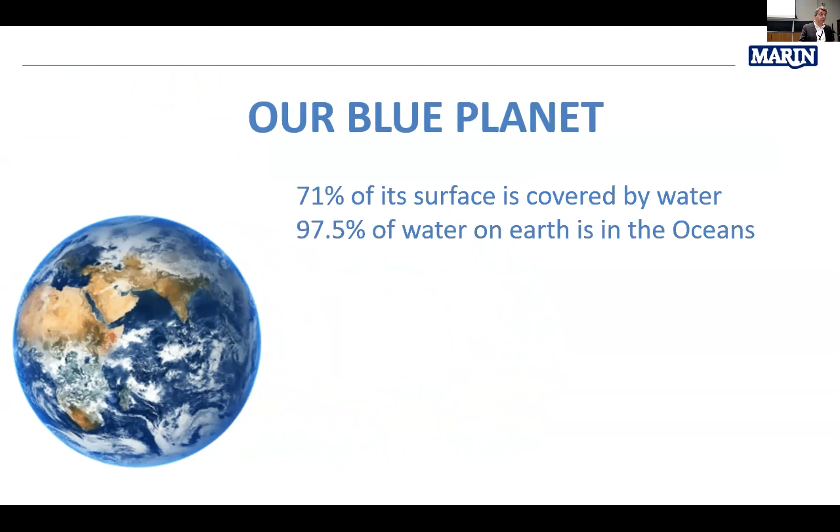Of course, I'd like to start with the most important of all, our blue planet. It's always good to remind people, I don't have to hammer that with naval architects and people busy with maritime engineering, but it's always good to remember that it's called Earth, but it's actually a blue planet. 70% of the surface is covered by water, and there's also quite a big deal of water on Earth present in the oceans.

And also, as you know, 80 to 90% of the world trade, depending on the type of trade, is transported by sea. Well, that shows how important our sector is, which is not always in the highlights, in the most prominent place in the news for the energy transition, but these numbers really show how important the maritime sector is.

We have to deal with about 119,000 ships worldwide, with gross tonnage of more than 100 gross tonnage. That's a lot to transform, because we know we'll have to come with a new generation of ships, and we'll probably have to refit a lot of them too. So it's quite a big job.

And maybe also important to know that 7,000 of those ships are transporting about half of all transport capacity, so that's a lot. That's also a niche market when you compare it to air transport or car transport, for example. So, well, that's our task: to transform this sector, and we hope we will contribute to it.

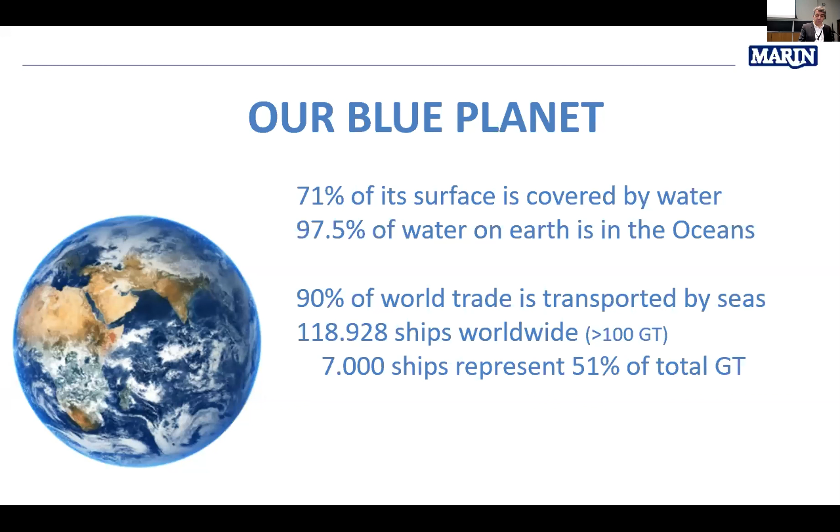Also important to remind that global emissions from shipping are about 3% of the total from all activities on Earth. So comparing the amount of activity with the emissions, we are not contributing so much, let's say, at least for GHG emissions.

The issue is that this number is expected to almost double in the coming years if we don't do anything. So we see that the whole maritime sector is really, really active at transforming its energy and also taking its share, maybe because of the close link with the ocean and Earth, showing examples despite the fact we are not always the prime interest for many regulations.

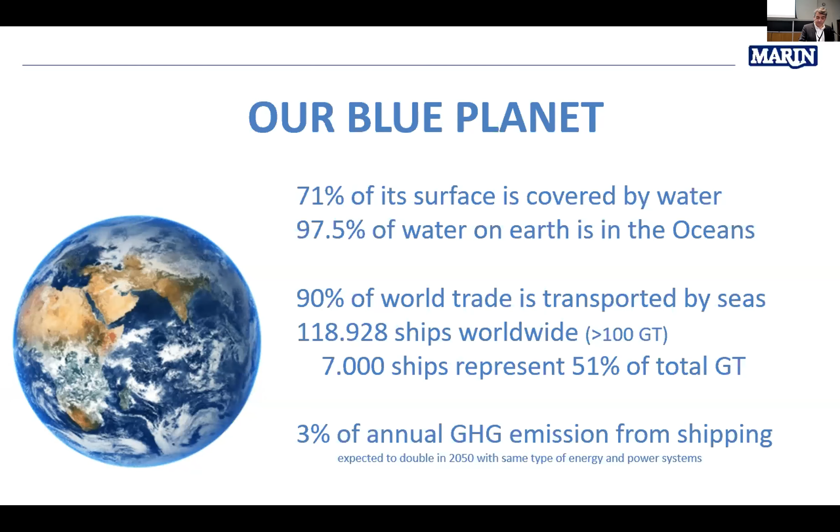Just looking back - in my discussions, I think when we started 10 years ago at MARIN talking about sustainability, things were quite clear. And I have more and more, also from industry, discussions about why are we doing that? Only 3%, what's the big deal? And Earth has been warmer earlier, so okay, why are we caring about it? So I just wanted to put that a little bit in perspective.

There have been some recent studies showing a clear relation between carbon dioxide and temperature on Earth. Of course, there have been times when Earth was much warmer than now, but life was maybe not so easy. What is at stake at this moment, as this change takes place, is that it's just too quick, too fast. We will probably be able to adapt as people - we'll use smart engineering to adapt and to go against rising seas, for example - but the rest of nature might have a really hard time.

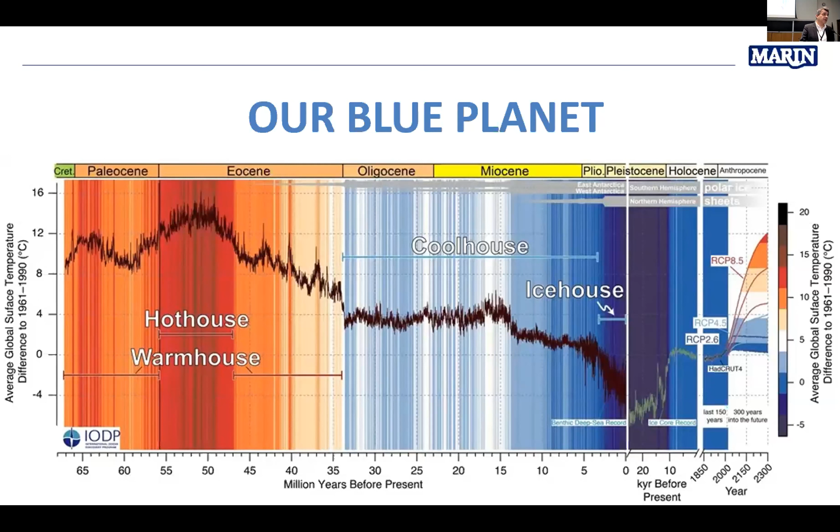All the changes that occurred on Earth over the last - this is from a recent study covering the last 60 million years - happened on the order of 100,000 years to 1 million years for the quicker changes. Now we have changes happening at an incredible rate, which is extremely worrying.

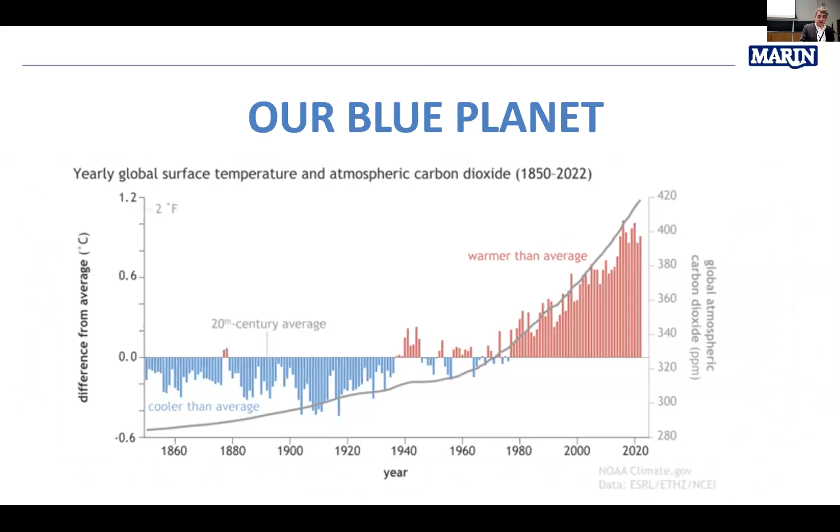Well, you know that part, the relation between our emissions and average temperature. This is what we're talking about - a very large rate of CO2 and other gases pouring into the atmosphere. That was also the origin of our wealth, our development, so we cannot complain about it. We have built incredible ships, transporting an amazing amount of goods with fossil energy.

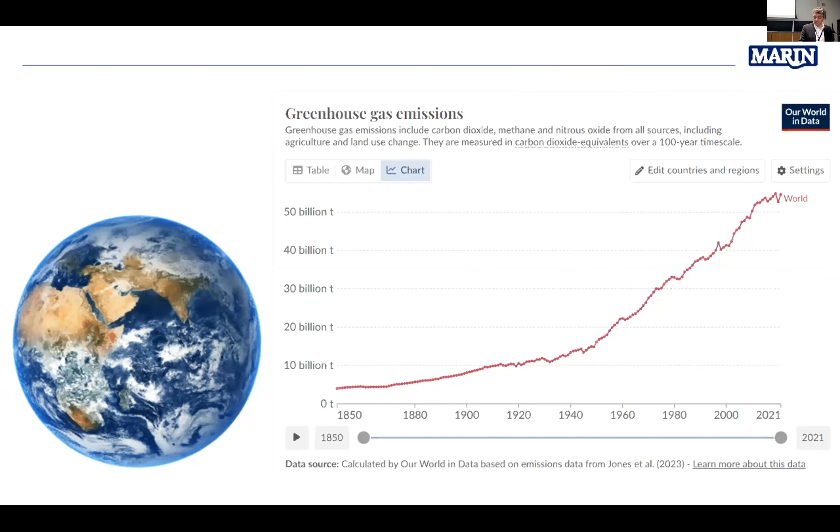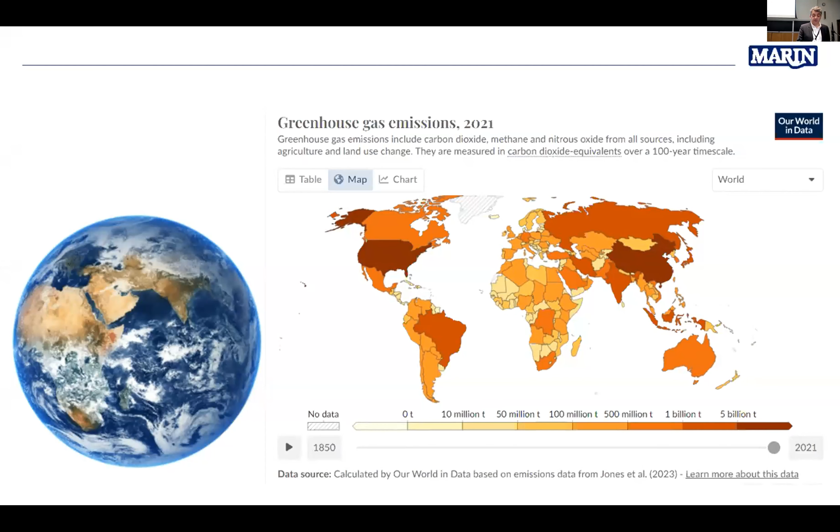But what is happening is that maritime is present everywhere, and we are taking care of transporting about everything that is transported on Earth. So if we, as a sector, can transform ourselves, that will surely have a consequence on the rest of the other sectors.

We are a kind of hard-to-abate sector, because we need a lot of power for ships, but we have a big advantage compared to air transport - we can manage a bit more displacement and volume with our ships. Still, we have quite big constraints in terms of autonomy and range, especially with new energy carriers.

On the good part, it's worth remembering - because we read in the press, and maybe you hear in your sector too - that ships are supposedly polluting incredibly more than any other means. It's always good to remember that when you look at transport capacity, ton per kilometer or ton-miles, maritime shipping is by far the best way to transport things on Earth - better than rail, better than inland waterway transport, better than trucks, better than planes. I think it's important to remind people of that, especially at political level, because they're making the rules, and we need to be helpful in that respect.

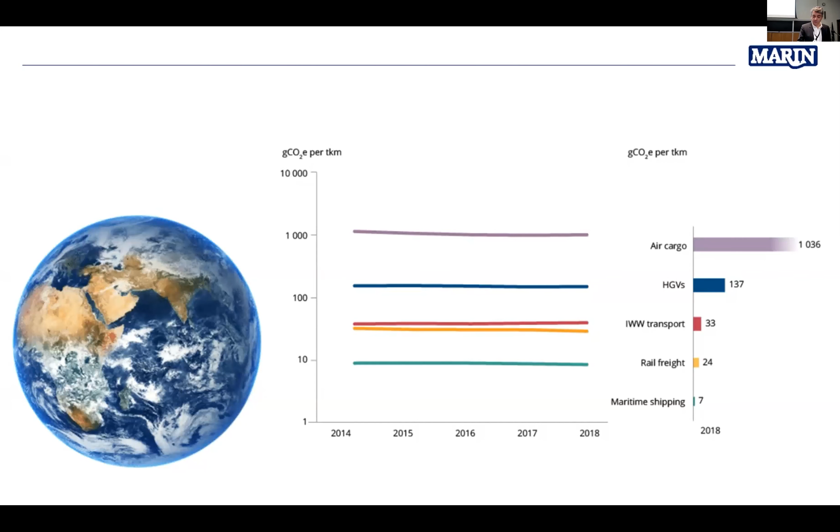I'd like to come back a little to the definition of emissions, because ships can emit many things. We have emissions that have a climate impact - that's the whole series of greenhouse gases. The most well-known is CO2, but also methane, fluorinated gas, and N2O.

Other types of emissions are more related to air quality - think about sulfur, SOx, NOx, fine particles. Very often in public opinion or in the news, those two categories are mixed up, so there are different types of conclusions taken about how bad ships are.

Another type of emission which is taking on large importance at this moment is underwater radiated noise. The focus on this is also increasing, with more stringent rules and local regulations to reduce the level of underwater noise. We have solutions for the shipping industry.

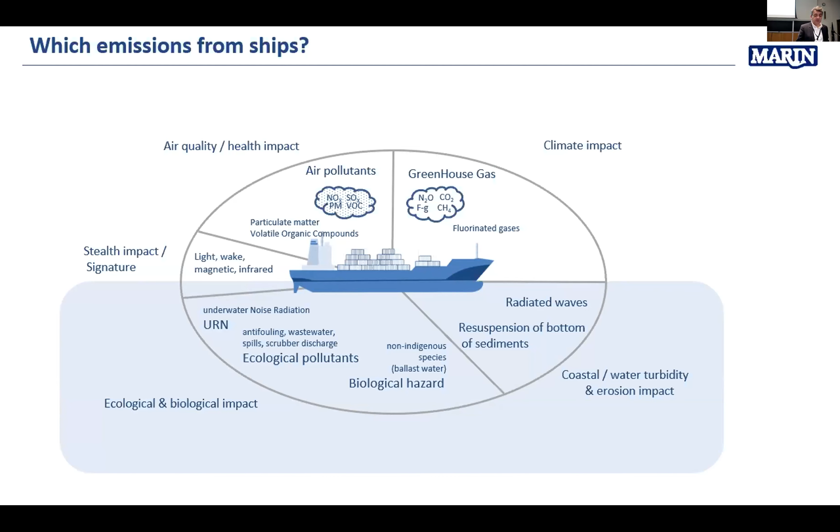I like to deal with some of these headlines that we see a lot, that we hear from friends, family, also in the news. It's almost like shipping bashing sometimes, with headlines like 'health risk for shipping pollution,' statements like 'massive container vessels equal 50 million cars' in terms of emission. I don't know if this plays a lot in the headlines in the US, but in Europe this type of news has had quite a lot of impact.

Big headlines from different newspapers, but you also see it starts to influence the political level. We've heard this type of statement from people in parliament who are making the rules. So it's very important to be very clear with the facts, to do fact checking, and try to avoid this type of big claims.

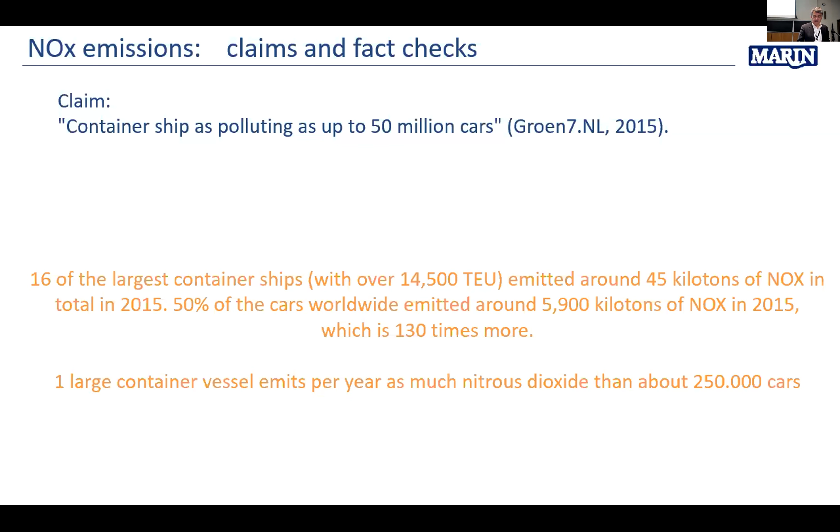So coming to the core of the presentation about designing sustainable ships, we need to have a very holistic approach. We used to work on specification, on trial condition, and we are becoming very good at having a target-based design for independent criteria.

And I'm very happy that we are also joining design and operation, because one without the other is just impossible to solve the issue. So we have to work on ship design, of course, but we also have to work on ship operations. But it's not only the ships, it's also the fuel infrastructure and the transport infrastructure.

And at last, also fleet and logistics. So it's very difficult because all the roles have been optimized through the years between naval architects, ship owners, harbor operations, trading, or the energy sector. But we need to bring all these parties together to make a move.

I would just use a simple parallel from the implementation of electric cars. Without good charging infrastructure for energy and a decent price, you cannot introduce electric cars in a country. Some companies have understood that very well, and they're successful. And we miss this type of approach at this moment from the shipping sector, which is very much separated between every specialty.

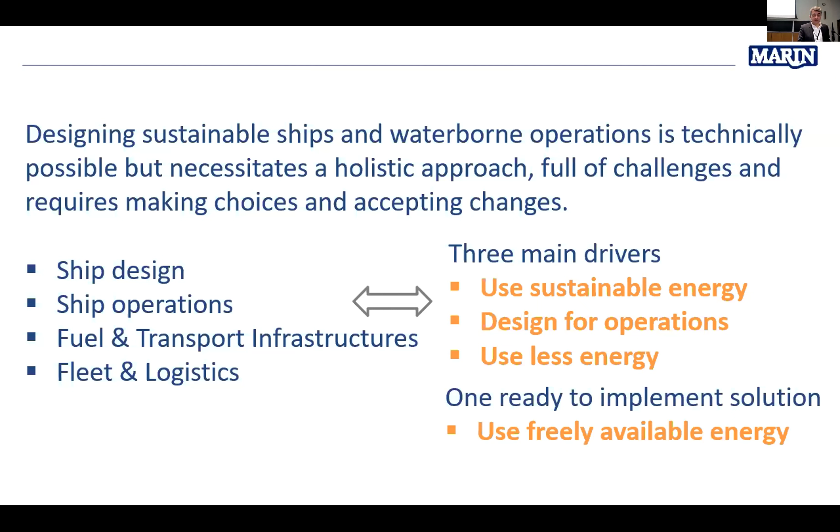And well, the last one, use freely available energy like wind. This is obvious, but I can tell you that 10 years ago, that was a very hard discussion. A lot of people find it very nice and pleasant, but not very serious. With the current developments, we are showing the world that we can do very serious things with wind.

Starting about sustainable energy, I will try to speed up a little bit, sorry, but I still have quite some slides. Just to remind the basics of the approach taken at this moment at Fuel EU regulation in Europe, but also brought to the IMO working group on sustainable alternative fuels, the life cycle assessment of our future energy use.

So not only looking at the emissions we produce while using the fuel on board ships, but how the fuel is also produced, to have a complete assessment of the emissions from well to wake. So from the resources up to what we deliver on the propeller.

There has been a lot of debate about that. I was part of a few discussions at European Commission to try to push that forward, because everybody thought like, no, holistic—I mean, the energy sector is doing his job and we are just using the fuel. We cannot be accountable for the fuel we are choosing.

Well, at the end of the day, I'm quite happy that life cycle assessment and the well-to-wake approach is being used, because it puts everybody facing his responsibility, and it will also imply that the energy sector and the shipping sector will have to work together to make this happen.

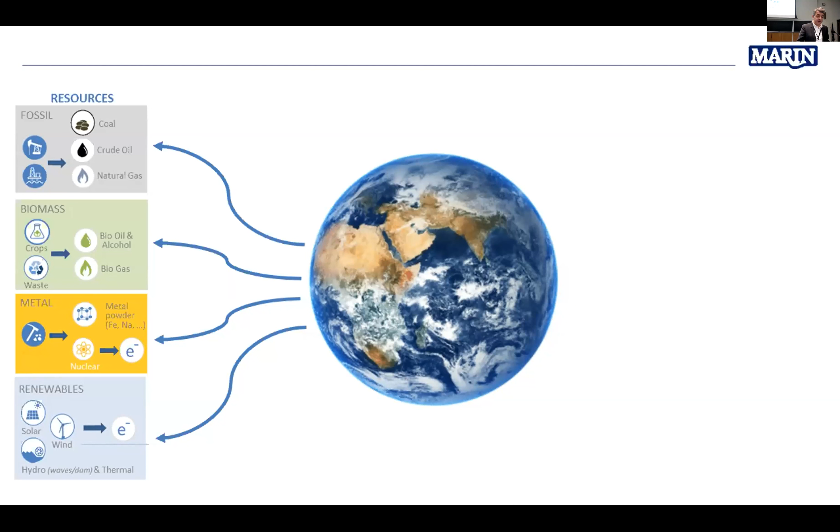We basically have different types of resources on Earth: fossil for a big part, biomass as well, metal also to produce nuclear energy, and different types of renewable energy. We are able, with different types of process, to create from these resources about any type of molecule. The more complex, basically, the larger the energy content, also the more expensive and the most energy losses.

With all those sources, you can, with certain production processes, create diesel, also synthetic diesel, but it's a complex molecule, C12H23, so that's why it's so rich in energy, but very complex to make if you don't get it for free from fossil source. Also, methane can also be synthetic or created with biomass and different types of process, LPG, ethanol.

And then we are coming more into dimethyl ether, methanol, ammonia, that can be made out of hydrogen or not. And we also have different types of more, let's say, exotic, not yet really at very high TRL level: liquid organic H2 carrier, formic acid, or sodium borohydride. So there are many things we can do.

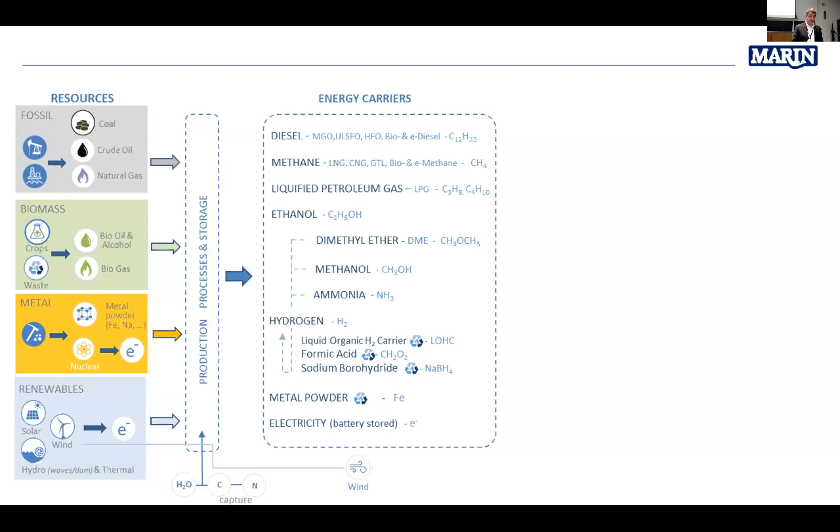Incredible. I mean, we don't lack ideas, we don't lack forms of energy. And this is maybe a problem, that we have a hard time to find which one will be the good one. Because when you make a choice and you're going to build a ship for 30 years of operation, it will be barely possible to change from ammonia to methanol or to methane, for example.

So this is part of the issue. Then we have to convert this energy on board. We can also combust the energy, back to internal combustion engines of different sizes, or we can just use the energy as electricity storage and through a fuel cell produce electricity on board.

And we see at this moment a lot of activity from yards. It will be announced, I hope published in a few months, but there are projects with liquefied hydrogen on board certain ships. Storage is quite a challenge. We also have compressed hydrogen for certain applications.

So it's quite a complex route on board. But I mean, some believe that it will be better for bunkering. Methanol is kind of easier than hydrogen, but you don't let the complexity stay on the shore to do all the transformation, you bring that on board. I'm not sure how far these solutions will go because they require a lot of complexity on board. On the other hand, we see a lot of shipyards and designers taking initiative to do something, and this is nice. They're exploring, and the future will tell if it's the right solution or not.

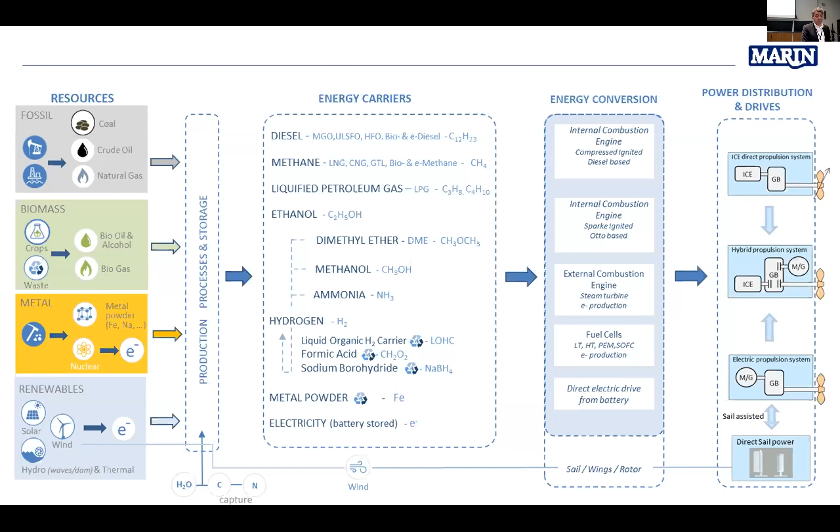I had a bit of a hard time at the beginning to put the lower part in this table, because that was proposed at the European Commission. They say, well, wind is not a commodity, you cannot store wind, so wind is good for energy production. But I told them, no, wind needs to be put here, it's also an energy carrier. Okay, you cannot store it, it's not a commodity you can have on board, and you don't pay for it. So it doesn't fit in the picture, but you can also use it as primary or secondary source of power. So wind is also at the bottom, hopefully, in this picture.

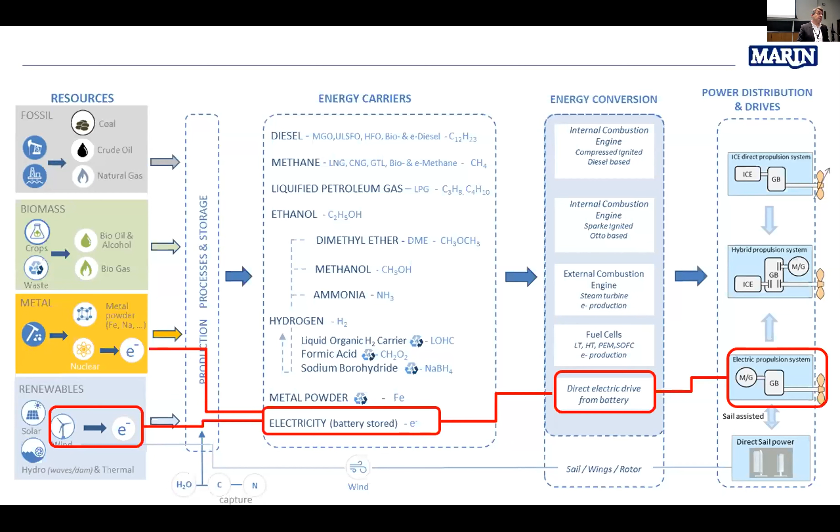Just to remind, maybe it's not needed anymore, but we can have the most direct drive from electricity to battery and electricity, let's say direct electric drivetrain. This is by far the most efficient in terms of energy losses. You have a little, and you produce not so much greenhouse gas emission.

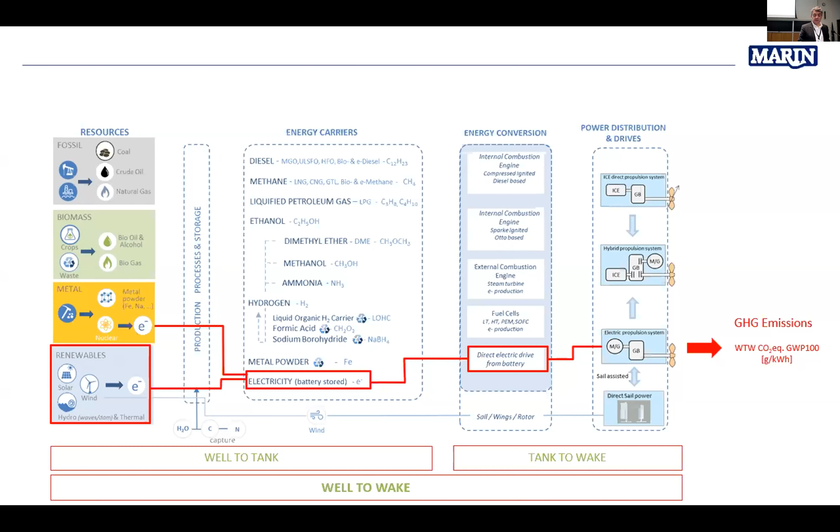If you start from renewable, storage battery, even counting for the manufacturing of batteries and recycling, and then direct drive, you could put that almost at zero. Let's say it's never zero, but very close to zero as total emission, well to wake. If you get your electricity from coal, you're not polluting on board, but the amount of total emission you produce is actually more than using MGO.

Same thing for ammonia. Ammonia is maybe the most extreme case because ammonia produced with renewable electricity, which is very trendy at this moment, is quite costly but has a very low level of emission. When you produce ammonia from fossil energy, it's about 6 times more emission than just using marine gas oil. So you hear sometimes, okay, we're going to use ammonia and gray hydrogen for 20 years because it will prepare the transition. But that means that in 20 years, we will be multiplying our emissions by a factor of 3 to 6 to reach the goal, which will just be too late, I'm afraid. So this is very important to understand.

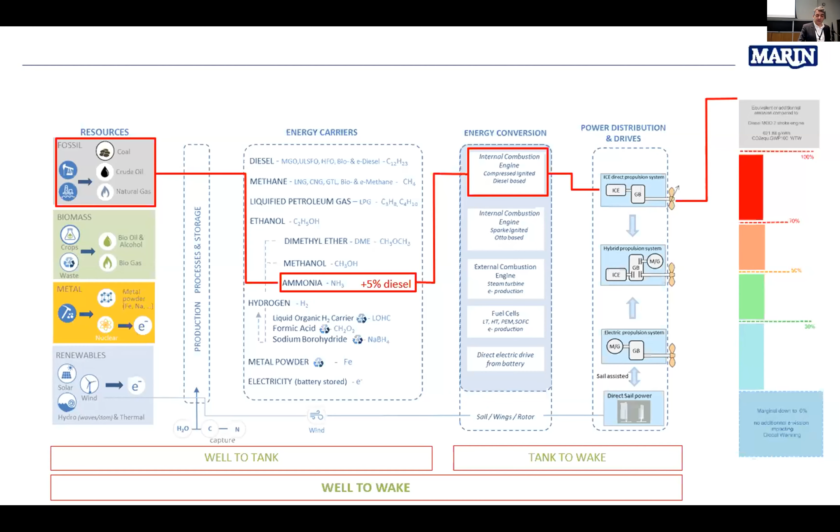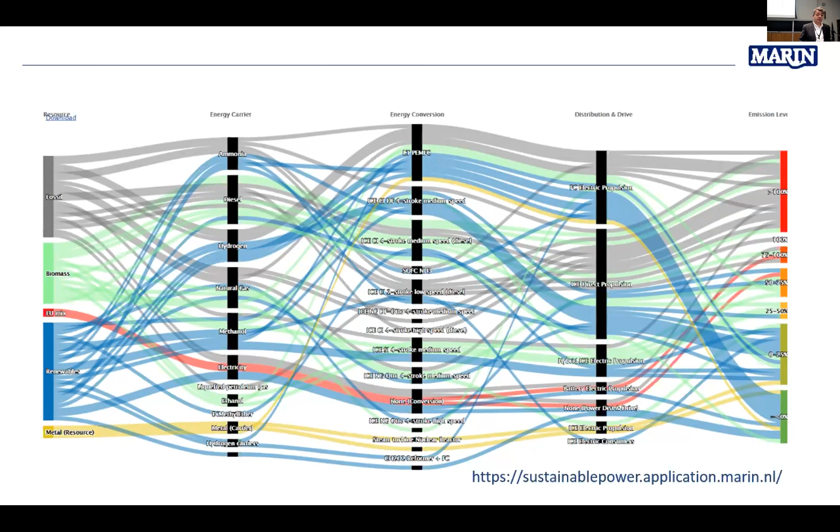This is what my colleagues called the French spaghetti at that time. I tried, through a portal, to have a clear view, because it was very difficult for us to understand how you can produce with watts and at the end what you bring to your shaft line. These are about 75 possibilities of pathways between resources, conversion, energy carrier conversion system, up to the shaft line, with different results in emission. We only listed about 70 to 80 here, but there are maybe 200, 300 ways, pathways to produce something. And this is showing why it's very difficult to ask ship owners and shipyards to take a decision, because which one is the good one here? It's an extremely difficult question.

Energy density is a challenge, and this is just to illustrate that. This is a short sea shipping container vessel design we worked on. I don't have the version with MGO, but the engine room is even smaller. So we went to a version with electric engine and batteries. Actually, part of the containers are just containers full of batteries, so you miss part of your payload. And the bottom picture on the right is the equivalent with hydrogen, so you lose even more payload. So you can have the energy on board—there are technical solutions to do it—but it has a direct impact on your payload. So it's earning capacity on the side of the ship owner, it's also space and net tonnage for the naval architect.

And those questions cannot be left behind during the new ship design spiral. The type of energy you will choose will almost govern the way you build your ship and think about your space on board, and even raise questions about autonomy, range, and displacement. Several projects started 10 years ago leaving these questions behind, saying we'll always find space to put a cooling system, we'll find a way on the deck. All these projects just never finished, the building was never done. There's one good example in Amsterdam, in a canal—this question had been left on the side, and at the end of the day, the yard realized they don't have space and enough displacement to fit all the equipment on board for their fuel cells.

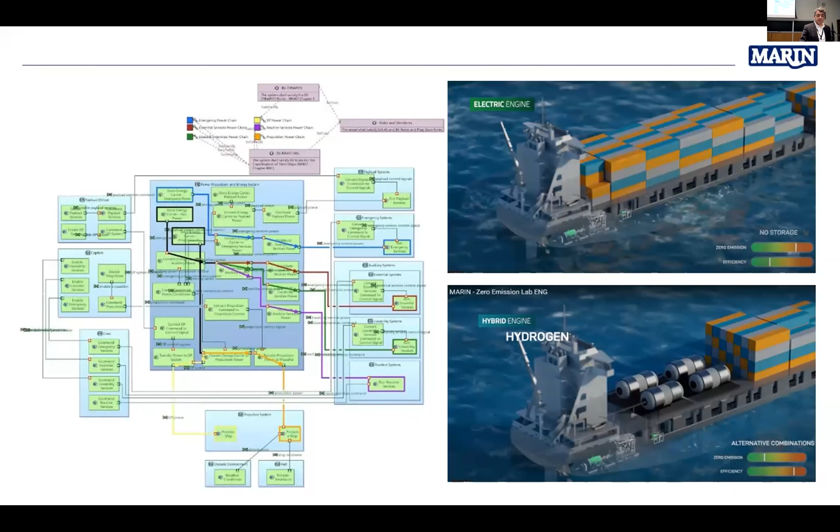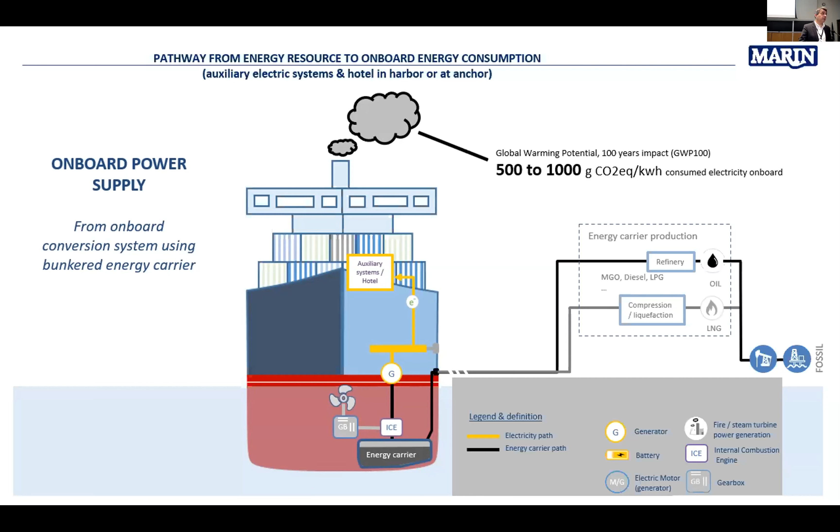There has been some options to also use OPS with direct shore power, so you need to do some fits on board. Well, you mentioned at this point that in the US...

There's less technological development than Europe, for example, for sustainable shipping. But for OPS, onshore power supply, the US is doing much better than Europe. There's been few regulations, especially in California on the West Coast, where it's just compulsory since 20 years, and ships have just adapted, and they find a way to plug the ships in and reduce the emissions. There are still discussions in Europe, so everybody says just vote it, do it, and the maritime sector will do it.

Hapag-Lloyd, for example, which is operating on the west coast of America but also in Europe, just tell us to do it, we will do it. We have the solutions, and there's still discussions because, well, politics, maybe interest of different harbors who are competing, and not the possibility to add a regulation at the same time everywhere, but it's still on.

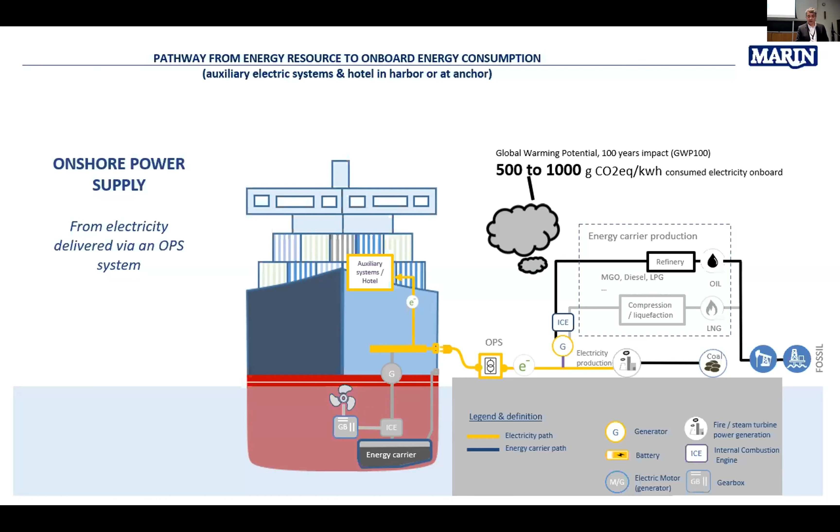Still, if you produce the electricity that you will provide the ships with fossil fuel, then you will just produce the same amount or more emissions, but just upstream, not in the harbor. So it could be good for the air quality in the harbor, which is often close to a big city, but for, let's say, global aspect, it will not help a lot. So you solve a local problem, but not the global one.

Another solution, of course, the most obvious, is to have the whole system OPS from renewable electricity. So that's also possible, but it's hard to store renewable electricity. And this is by far the system that has the least energy losses. You lose about 11% in the whole thing, and the costs are pretty small.

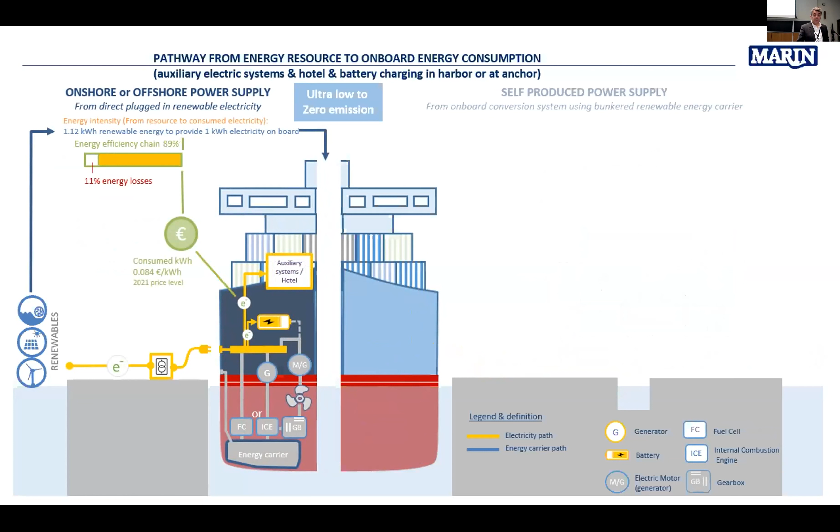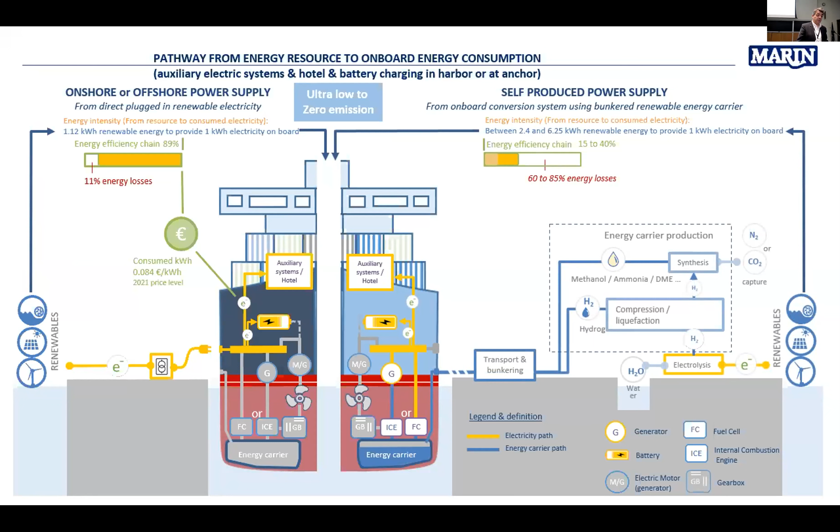Another option can be to have alternative sustainable energy carriers based on renewable electricity, put them on the ship, and the ship will produce its own electricity. It's also possible, also not much emission, but you lose about 60 to 85% of your renewable energy to start with, which is quite a pity.

In the winter months, 4 months long, they cannot operate in the North Sea. Weather is too harsh, and they are just onshore in Rotterdam, close to the center, just burning fuel and polluting massively the whole area. They decided to change that, so they have put a power connection of 20 megawatts 2 years ago and connected the 2 platforms to the grid.

Well, that's something because it's like 15,000 homes, so you need to improve your energy infrastructure, so it's not a small thing. And that shows how it's important to combine the infrastructure, hardware infrastructure, with our pathway to sustainability. So what they say is it's about, let's say, a yearly emission equivalent of 5,000 diesel cars, so the air quality since that moment, just plugging in, improved a lot.

Well, there's still a lot of cruise vessels going there. Queen Mary was there just a week ago, so these ships also should be plugged in a way.

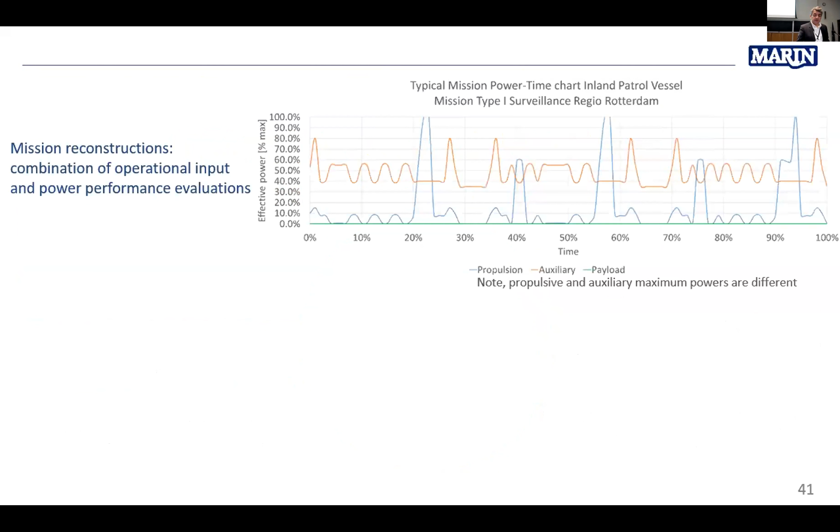Design for operation, on that part, I will go very briefly because I think I showed that 3 years ago also. There's not much change in the principle, but basically you need to know as an architect how the power, how the energy is used on board during operation. So it's not only a few specs, but it's also interviewing the crew, the captain, looking at the logbook and the information about the operation, discussing if the operation can be different. But you really need to know how your power is going and how you use it and for how long, because that will provide you the dimension of your solutions on board.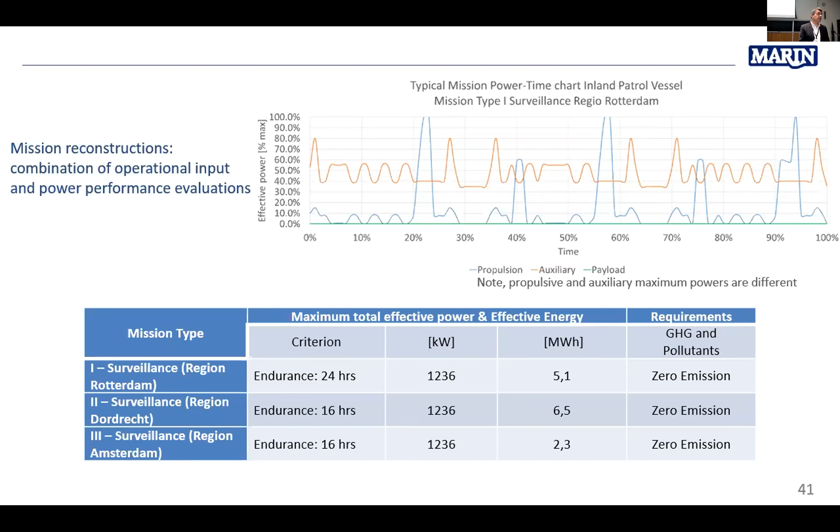This is a typical inland patrol vessel in the Netherlands, but it's also a bit coastline because, well, there's not always a clear difference between the coastline and inland there. So the ship has to do some endurance time with given power and also some surveillance in different regions. And you really need to look at how the power is consumed and the energy to be able to have the right solutions. This is the way we are doing it.

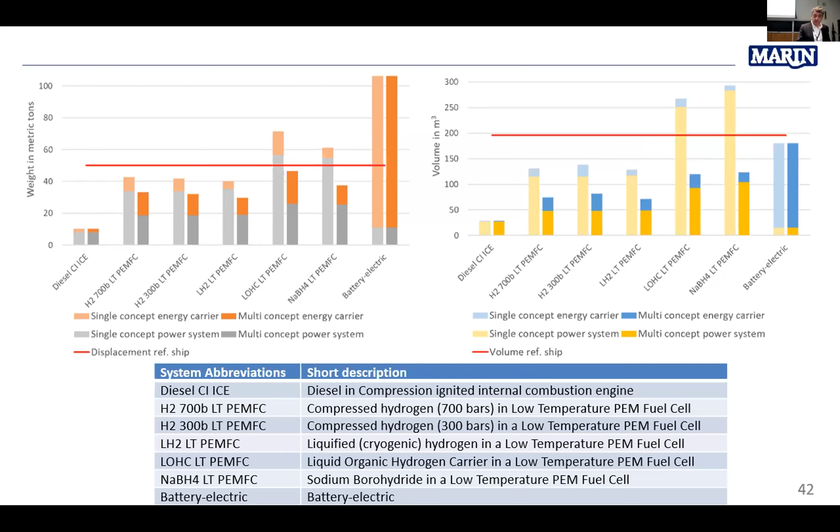It discards a lot of solutions that could be really interesting in terms of performance, but they just don't fit. Or you need to go back to the design loop and say we need a bigger ship to do the operations to be able to fit that. So this part is really crucial in ship design.

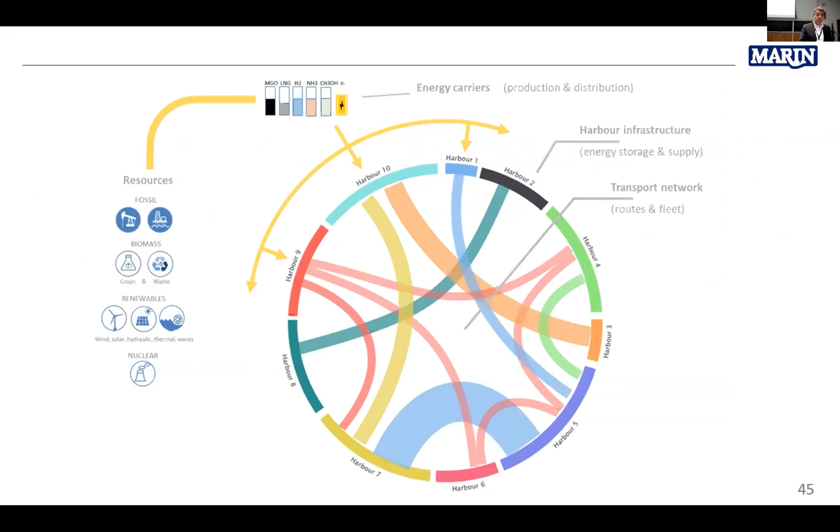Looking at the macro perspective, as I told you, in recent studies we always have to combine the energy part, infrastructure, ships, and operation. We did that in a recent project at European level, trying to simulate the whole network in a region over a 30 year lifespan. This is an example for Greece, where we simulated all 860 vessels doing transport between islands, carrying goods and passengers, over the whole year, for 30 years.

And then we looked at the operation with diesel. So we have the data, it's just working. There's a certain emission level, a certain cost. And then we started looking at strategies.

What was very interesting there during the discussion, because we were doing that with the Greek authority, is that you have questions related to the shipyard and ship design. Okay, we're going to transport the same boat going from island to island and only change that. Then you hit the first constraints about where the energy is coming from. And then you have to talk to the harbor: can you imagine providing and implementing this amount of energy in 10 or 15 years?

And then you discuss with the ship owners, who say, well, can I pay for that? What is the prospect on energy price if I commit myself to electricity? Will the price remain constant, or is it going to fluctuate like last year, especially in Europe, where electricity has almost been multiplied by 4 for certain sectors due to the impact of the war in Ukraine? So all those things create uncertainty about price.

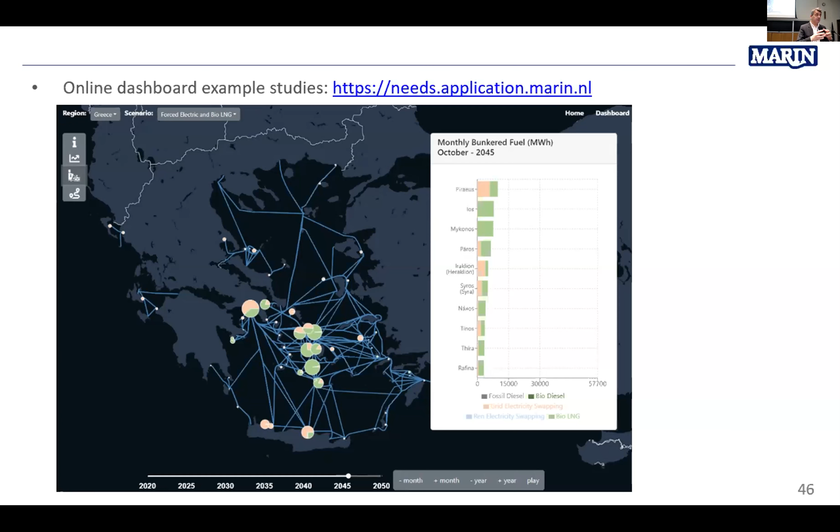That will have an impact on investment and decisions about infrastructure. We need to be backed up by harbors and authorities to provide the energy where needed, and also by decisions from shipyards and ship designers. The three really have to work together to be able to implement a solution.

So we are working on many simulations of that. The first stages are also available online. What is interesting is not really the results themselves, but the discussions that led to the different scenarios. We realized that everybody around the table creating a scenario was just saying, oh, I can do that, but the problem is yours. Oh no, I can do that, but the problem is yours. So they had to agree on a kind of common strategy to be able to implement changes.

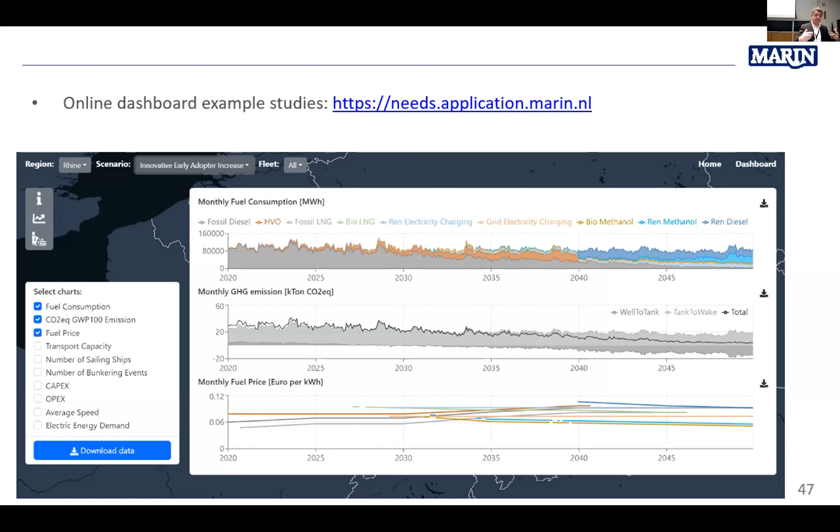Using less energy was also one of the important aspects. Hull optimization and hydrodynamic performance will remain very, very important. I heard a few years ago that we have optimized ships so much now, and we know how to do it with CFD and all the tools, that it's just like polishing the stone. This expression was used a lot, like we know how to do it, there's no need to do more, we have good ships now. But it's not true.

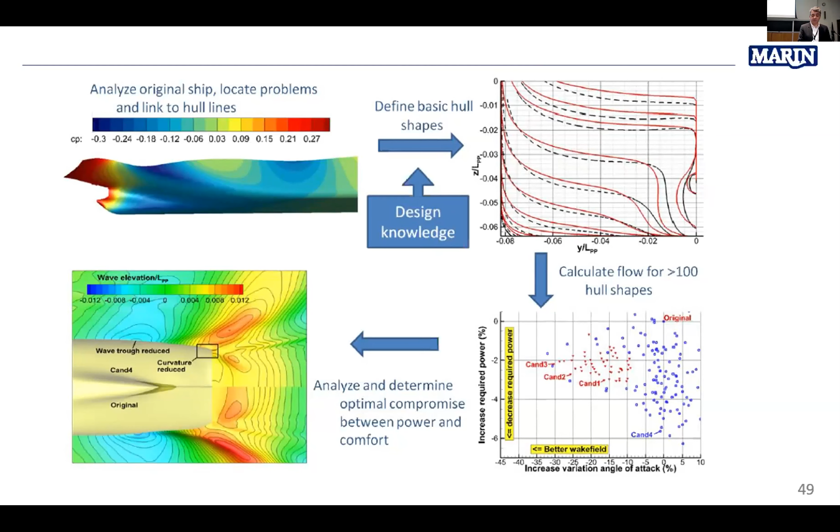We need to keep being very, very sharp with ship performance. So hydrodynamics, don't forget it, it's extremely important. Students should keep working on hydrodynamics, we need good performing hulls, and also good propellers. We can do a lot of simulations, but the art is always to find a compromise and find the right propellers.

Then, last but not least, use free available energy. Wind is just one example, because the most sustainable energy is simply the energy you don't use, and this is really important. What we see in the trend is that retrofitting large ships gives about 5-6% reduction in energy needed for operation, because you put wind devices on ships that weren't designed for them, so they also can't cope with much side force.

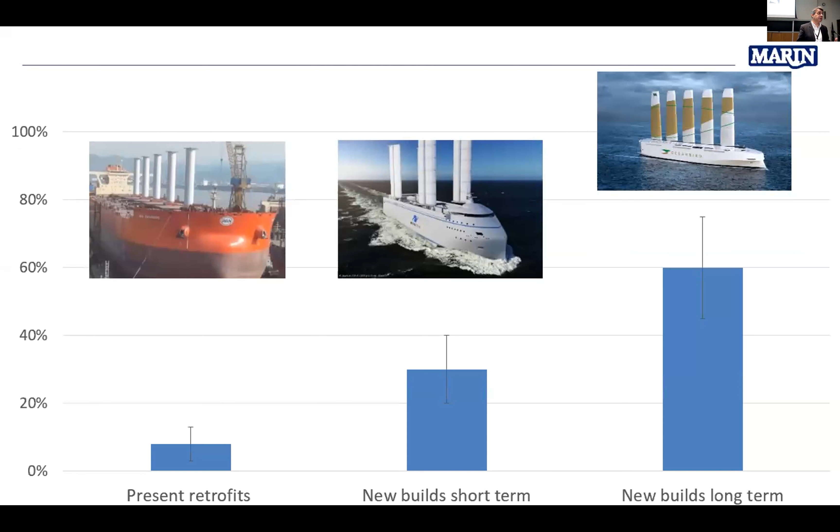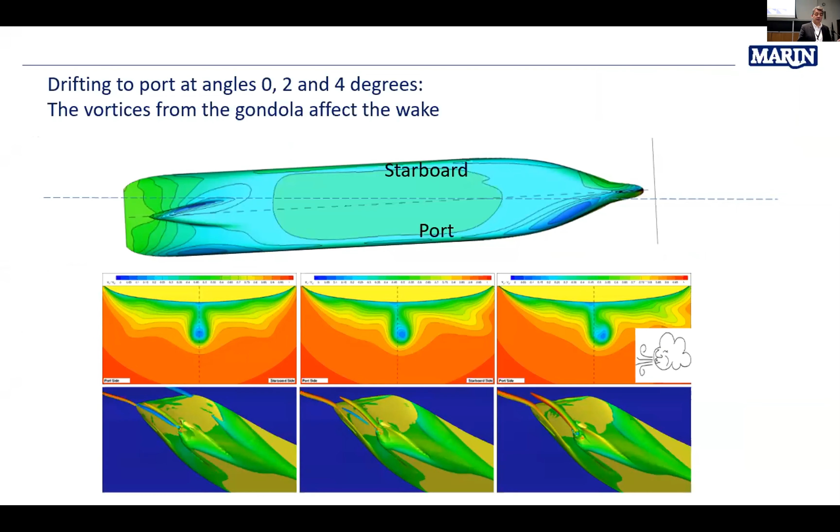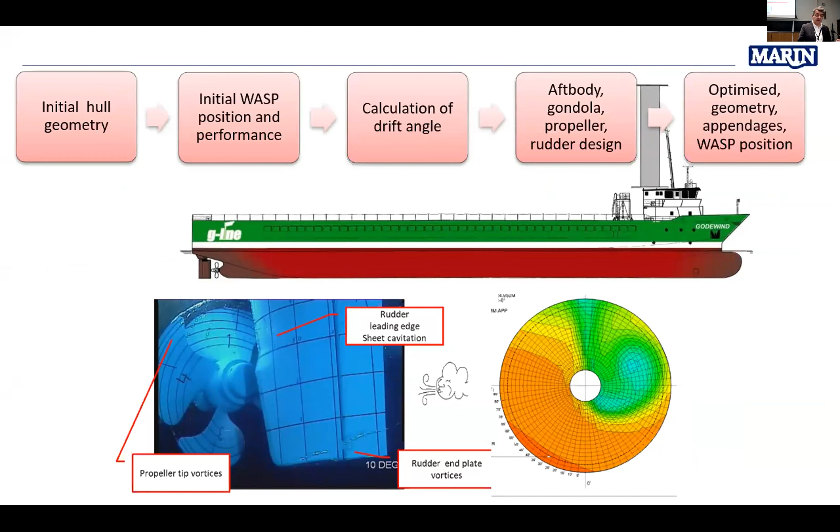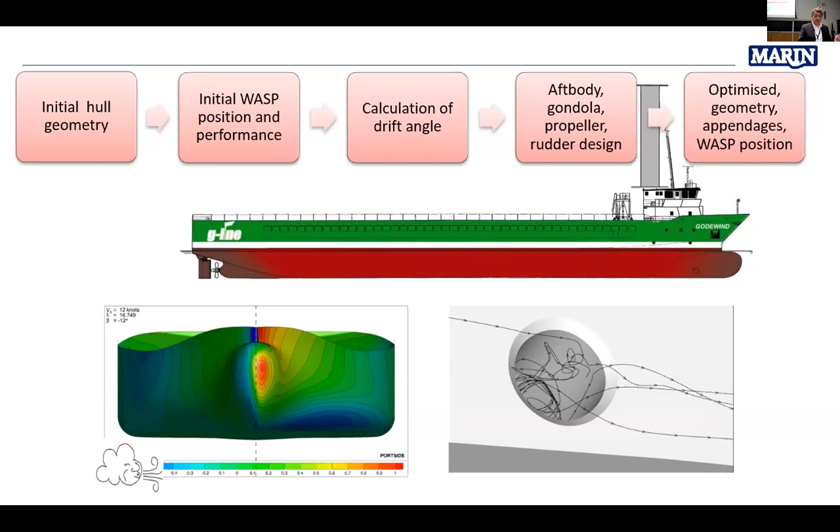You will have asymmetrical flow in the propeller disc, so propeller design will have an extra dimension of complexity, also appendage design, and a lot of asymmetric flow optimization. That will be even more difficult, because it's not only finding the best compromise in speed, range, and draft for certain operation, but also combination of heel and drift angle for the hull form. That's going to be quite a good exercise to find the best compromise for this type of ships.

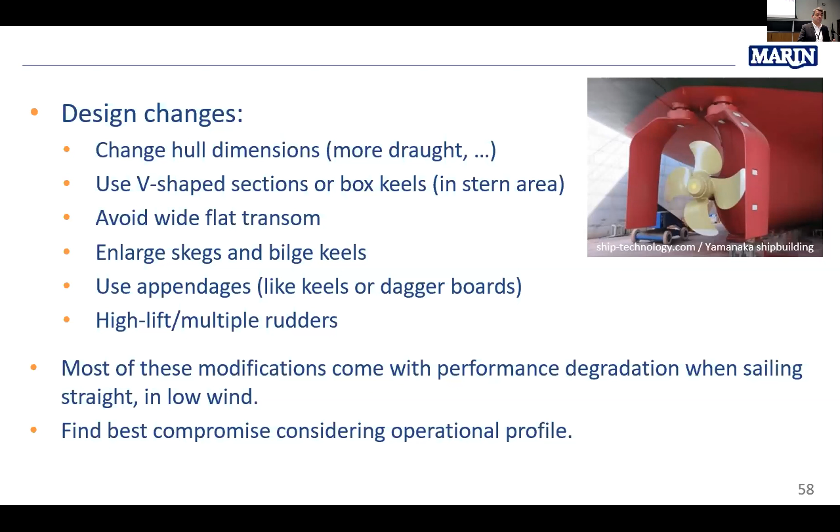What will basically change? More draft for ships, because they will have to have a deeper hull to counteract the side force of the sails. More U-shape, V-shape, and flat aftbody are great, but not when you're sailing at even a slight heel angle. So V-shape is more important, or with flat stern, work more on the appendages, on skeg and bilge keels, and high lift rudders, for example, or even daggerboards. So all these things will have to be put into the design.

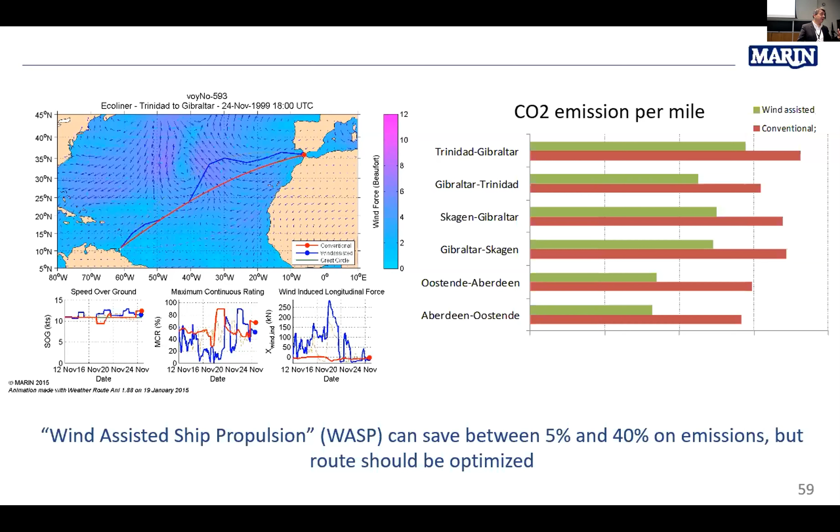This is something I showed already about the performance of ships improving. These were calculations done a few years ago between Europe and Guyana, and we hope to reach, with different wind assistance on existing ships, between 5 to 40% of emissions reduction. This has been calculated a long time ago. We are very happy now that the first ships are being built and starting their operation. Cross fingers, but I hope and trust that they will prove and show that those calculations are real and they can really reach this type of performance.

This is one that I hope will have a big impact on shipping, especially cross-Atlantic shipping. That's the project Neoline, where we hope to reach up to 75% reduction for the same payload capacity, but with a longer crossing, going from about 5-6 days to 12 days, while being able to carry goods between Europe and America with 75% reduction in emissions. We will know about that one in about 2 years. The ship is under construction, and I hope in 2 years we'll be able to come back confirming these numbers.

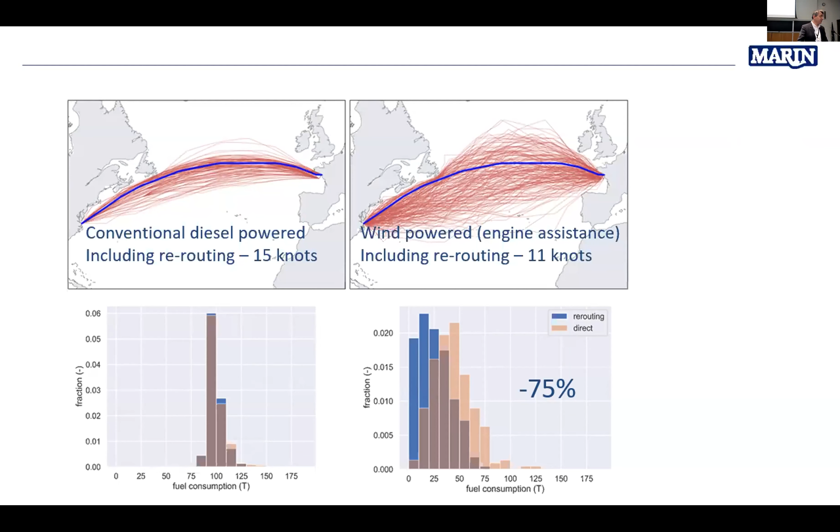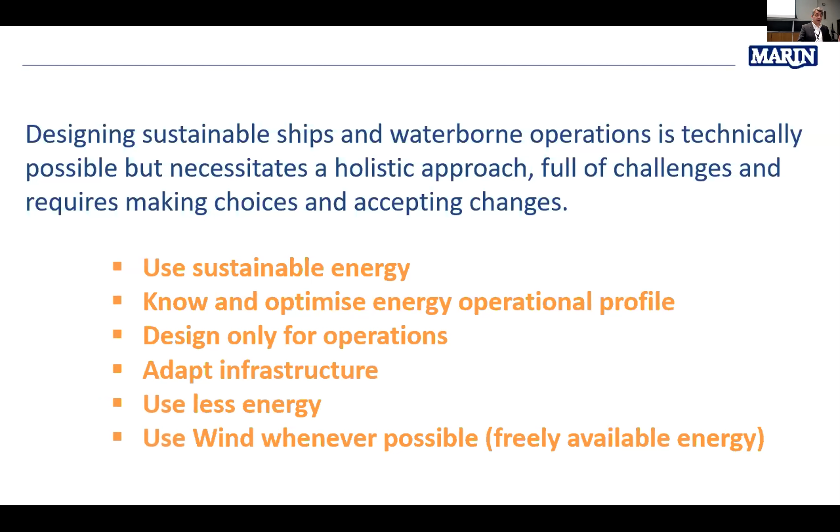Using sustainable energy is very important. Optimize the energy operational profile and know it, so you have to go very early into discussion with the user of the ships. Only design for operation, not for trial speed anymore. Work on the infrastructures, use less energy, and use wind. These are really the important takeaways for ship design of the future.

We had shown this type of pictures a few years ago, all nice computer generated pictures. We also used that one, the Canopée, for our first conference, so we were quite proud. We thought, yes, we're going to have some ships, but the route is always uncertain. And I'm very happy because it's quite a coincidence.

Last week, this ship made its first crossing, transatlantic from Europe to Guyana. One of my colleagues was on board. This is just a picture taken from a drone, less than a week ago, so it's not yet in the press. It's really something new for today. And they have had a wonderful crossing.

It's always surprising to see that the concept picture is almost identical. So I can promise you, the right one, that's not fake news - it's a real ship and a real photo. They have been instrumenting the ship, measuring the performance, and did a wonderful crossing. We cannot present results yet; they are, let's say, crunched. We're going to work on it, but I trust and hope there will be a lot of publication. This is to show you that it's possible.

We had ideas, we had a wish to change things, and this is just happening with several initiatives. We trust that this initiative will really inspire many ship owners to change the way they design, and how they want us to design and operate ships.

Some words to finish. Success is not final - many projects show that, you need to keep on working to convince. Failure is not fatal either - just try again. It's never there, but it's the courage to continue that counts. The ones who are putting these ships into service at this moment are very, very courageous people. I can tell you, they don't have much funding, they have a lot of critics, but still they do it, and they find the right way and the right contacts to do it. Chapeau, because it's really not an easy way to do that.